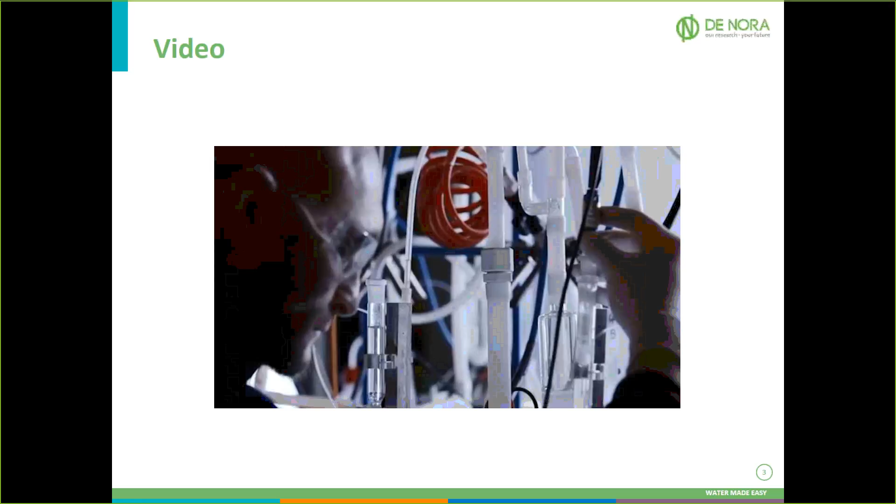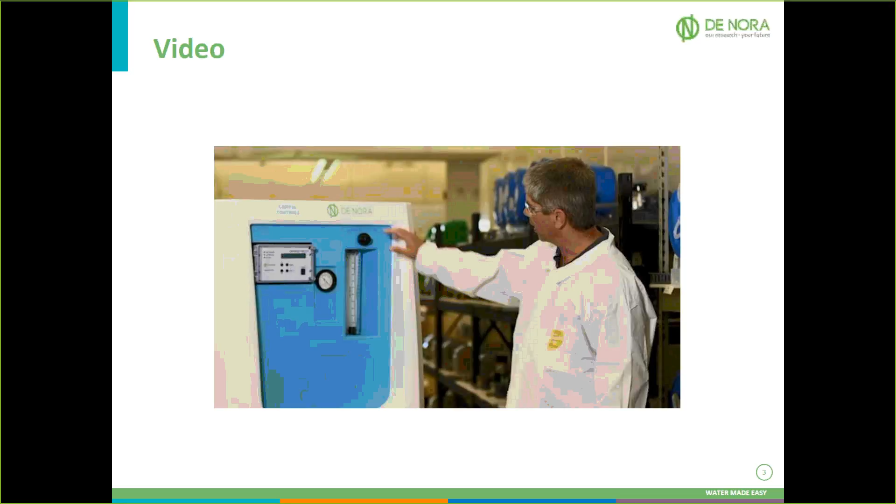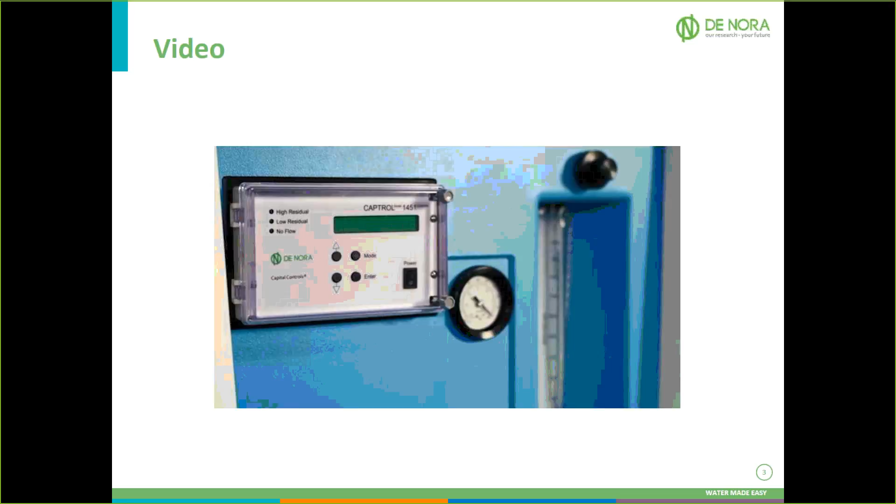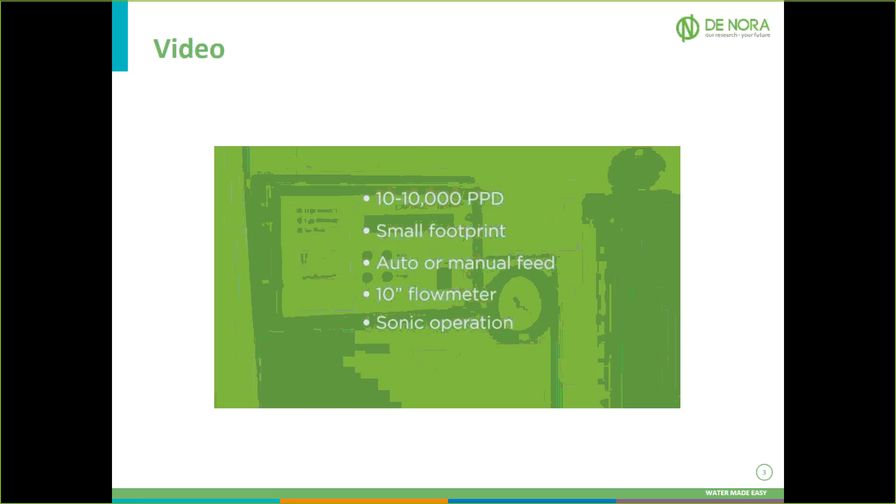Sustainable technologies offering energy-saving products and water treatment solutions. Present in 12 countries, De Nora is an Italian multinational with 23 offices, 12 manufacturing facilities, and research centers in Italy, the US, and Japan. With its continuous focus on new product development and innovation, in 2015 De Nora acquired a series of familiar water treatment brands, among them the Capital Controls product line, an industry pioneer. I'm very proud of our brand's heritage: in 1950, Capital Controls invented the vacuum gas feed system, very unique to operate and highly reliable, which is why it's been the industry standard for over 50 years now, with 355 patents and more than 2,700 territorial extensions. The products incorporate reliable Capital Controls technology with innovative new features, including a pressure monitor to refine the gas cabinets. Each compact cabinet is available with automatic or manual feed and a 10-inch flow meter for ease of reading, and a differential pressure regulator. On the full automatic model, an additional controller may not be needed, reducing extra equipment and costs for our end users. We believe this makes it easy for engineers and end users to clearly identify what type of equipment is needed for specific applications and functions.

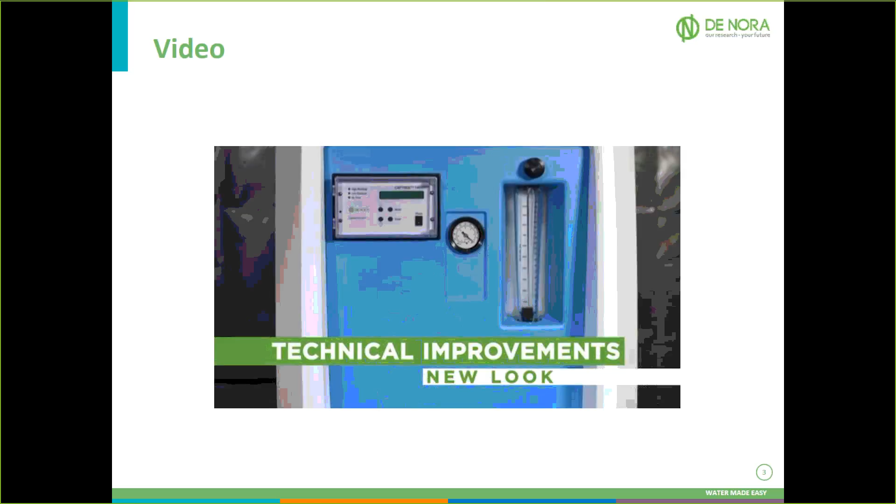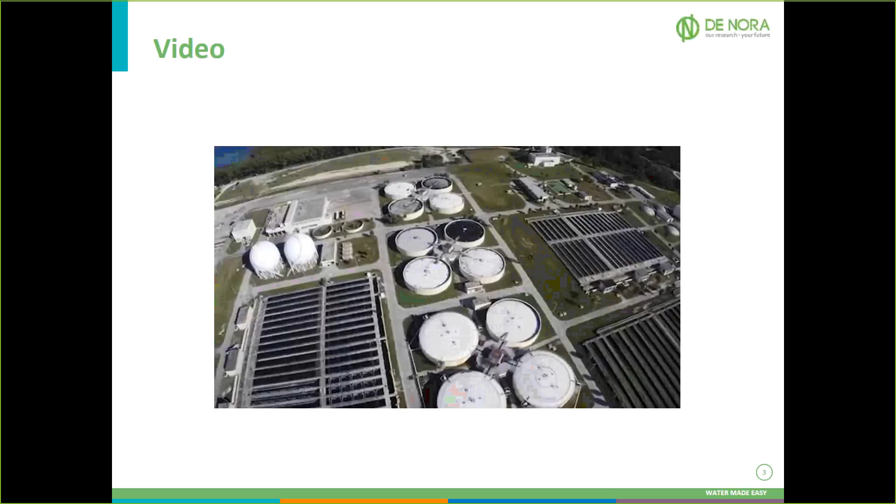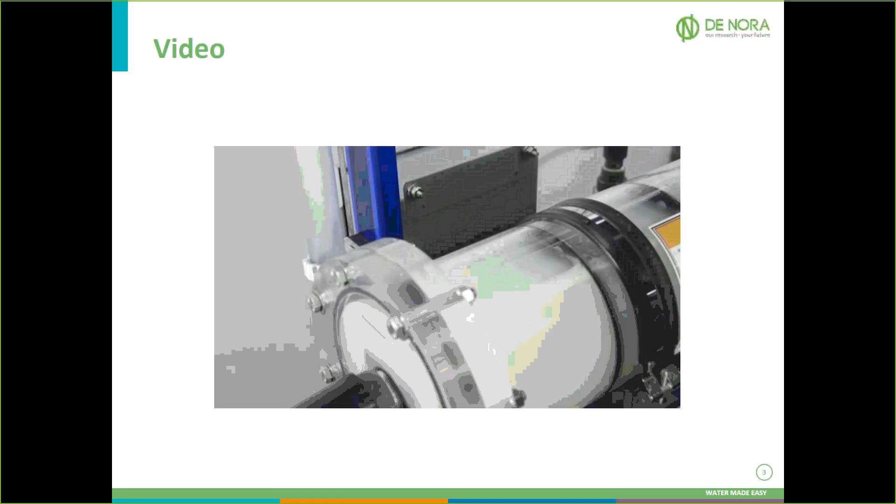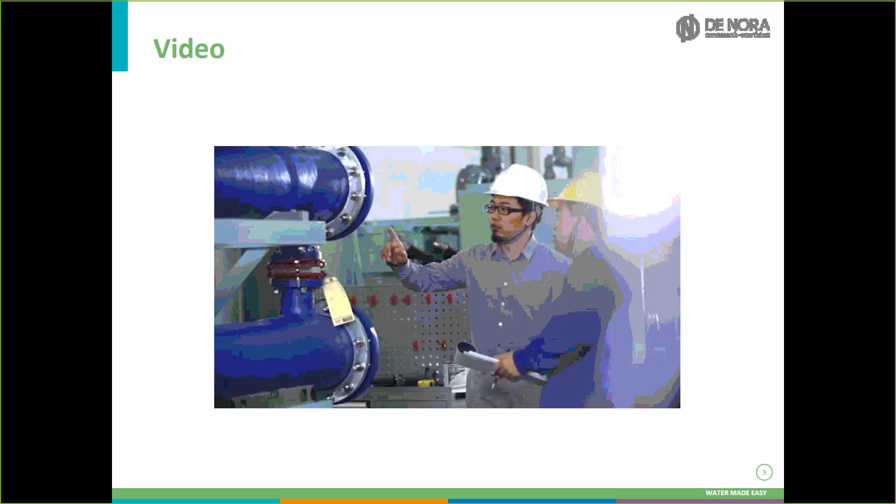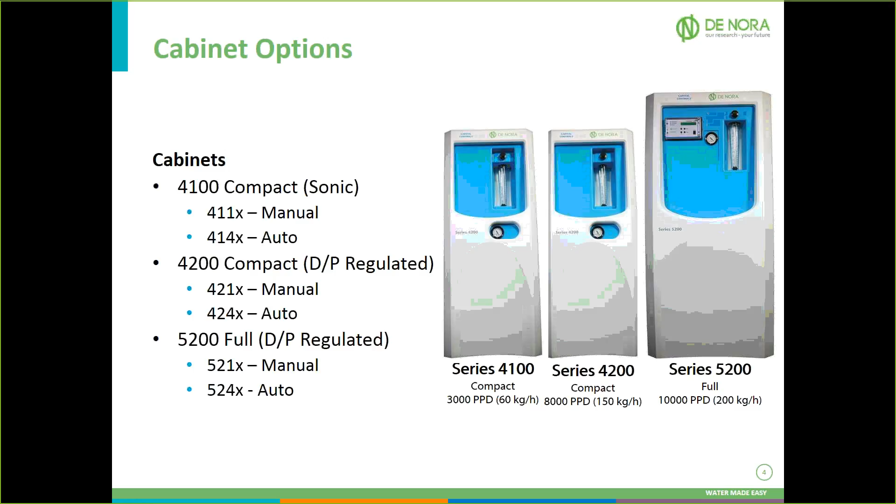So the cabinets range from small to 10,000 pounds a day. All of our cabinets now feature a 10-inch large flow meter rotameter. In the past, some cabinets had a 6-inch rotameter, but the nice large 10-inch rotameter is easier to see from far away. A lot of times these cabinets are in a chlorination room, and sometimes you're looking in through a window, so it's nice to have a big large flow meter you can see. We've standardized around a large flow meter for all these.

We've also standardized around the Chloromatic valve, so that all of our automatic valves feature a single input right to the valve itself. So if you have an application with a single input, whether it's a simple flow pacing application or even some applications where the SCADA system is doing the control and you're sending a flow signal into the cabinet, there's no need for a controller on all of our automatic cabinets now.

It's just a single input application. And like we said on the 4100 series, up to 3,000 pounds a day. That's a sonic unit, so no need for a differential pressure regulator, which keeps the cost down.

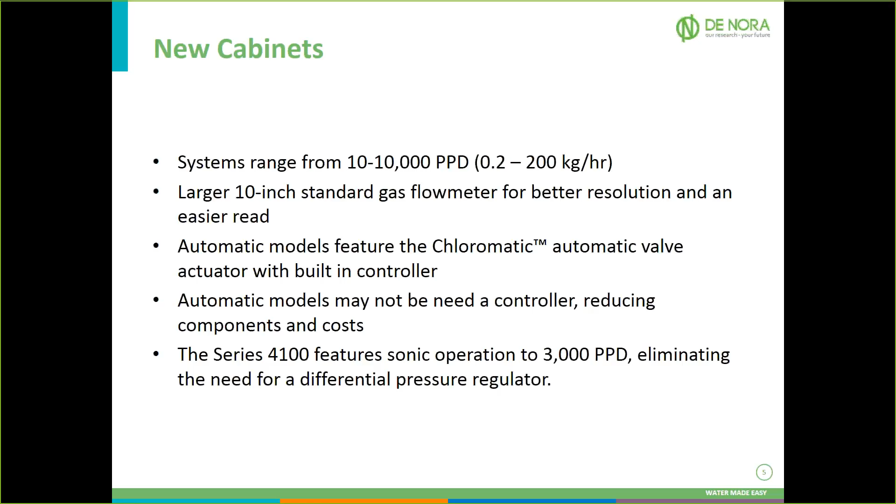All the automatic cabinets are standardized around that actuator. That's basically what we've done to the cabinets we announced at the show, and we're excited to get feedback as we start seeing those out in the field next year, 2018. I also wanted to describe a bit more and round out our chlorinator line.

We've made some changes to the chlorinator line. We've got our Series 2000 CV wall valve and Series 3000 CV wall valve. For those familiar with the old 70CV2000 and 70CV3000, we've changed the names and repackaged them. So now for a wall valve, we have a 2000 CV and a 3000 CV.

We've packaged those. We've always had the 3000 CV valve, the triple input valve, on a wall panel, but we also released the 2000 valve on a wall panel - the new 2000 WP you see here. We have a couple different sizes for these valves, from up to 500 pounds a day up to 3,000 pounds a day in different configurations.

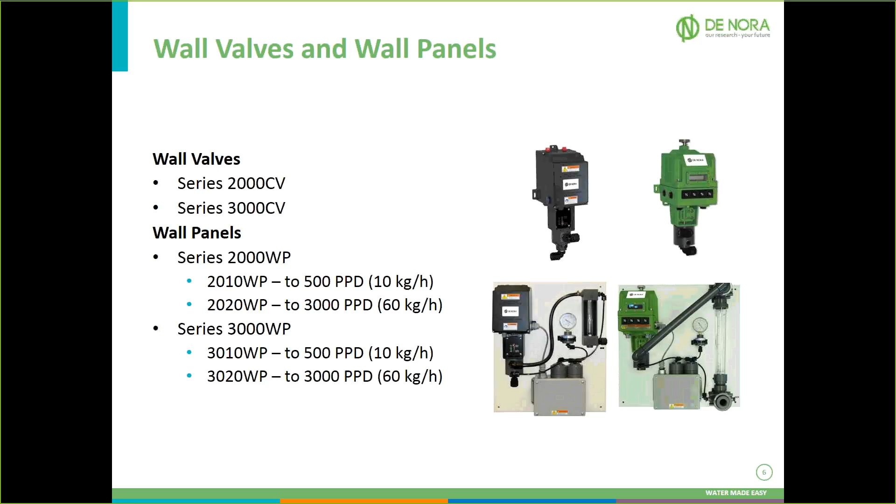These are available as wall panels, where we provide the panel along with vacuum gauges and vacuum switches if needed, or just as a wall valve mounted directly on the wall. Here's the 2000 CV packaged as a wall panel, available from 25 to 3,000 pounds a day.

The vacuum switch box here is an optional adder, sold separately, so if you need it you can buy it separately and just wire it in or plug it in. The vacuum gauge is also sold separately - you can buy that and plug it in as well.

Just like the cabinet, we've built in a single input controller. It does ratio control, so if you have a simple flow pacing operation, there's no need for a separate controller - this valve will take that signal right in, and away you go.

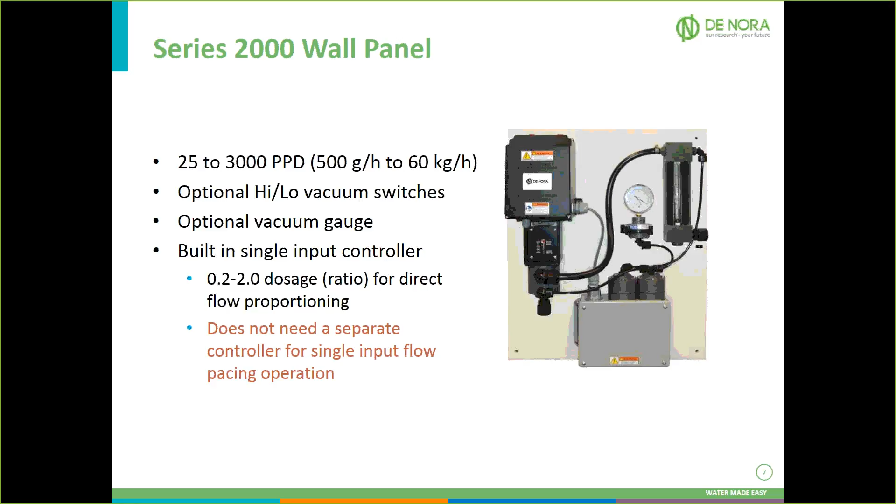And of course we have the 3000 series valve. For those familiar with the CV 3000, that's essentially this valve - we just renamed it and simplified the name. So it's now the 3000, and in this case we're showing it in the WP, on a wall panel. The gauge comes standard.

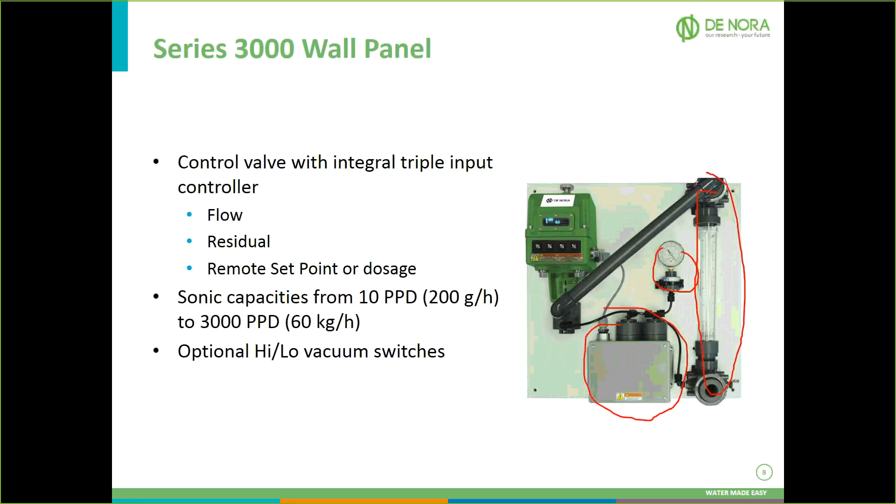The vacuum box switch is optional, and of course there's a nice large 10-inch flow meter that we're going with. This package - I'm pretty familiar with it, we've done this for quite a while - we just renamed it and changed a bit how the options are sold. It's the same 3,000 CV valve that we've seen a lot of success with over the last several years.

As a reminder rule of thumb: for the wall valve, the 70CV3000 is now 3,000 CV, the 70CV2000 is 2,000 CV. We discontinued the old Advance 1410 for those familiar with it, and replaced it with our 2,000 CV or 3,000 CV. So you'll need to work with your salespeople if you do a replacement.

On the wall panels, the old WP 1410 and 840 that you guys have out there need to be replaced with the new 2,000 or 3,000 wall panels. Feature for feature, we've got all the features we had before, just in a new configuration. The 2,000 WP goes to 2,000 CV, and the 70 CV 3000 goes to 3,000 WP - just little naming scheme changes we've made, with all the same functionality and product demand as before, just under a new product line.

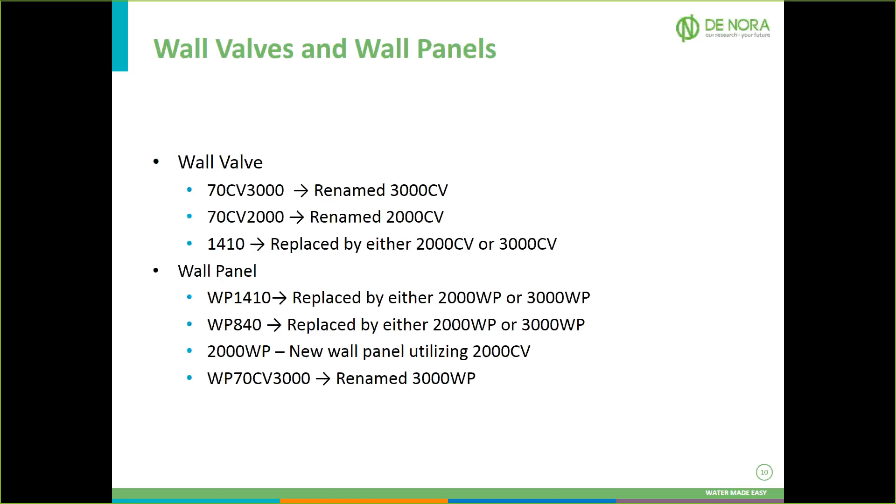So we can also do retrofits. If you have customers with existing applications or components, give us a call, give your regional manager a call, and we can help figure out how to take you from the current technology to the new technology. A lot of this can be retrofitted into existing applications—often we're just changing pictures and serial numbers of equipment that's already out there if we want to upgrade it. So I encourage people to work with the channel partners, myself, or the folks here at the factory, Phil Fallon or Mahoney, to figure out appropriate upgrade paths for customers.

Now we'll talk about the MicroChem 3. We released this at the ACE show earlier this year in June, and I'm happy to say we're shipping products right now. This is our new chlorine analyzer—really a whole analyzer family that we released, replacing the MicroChem 2 that we've had out for a number of years.

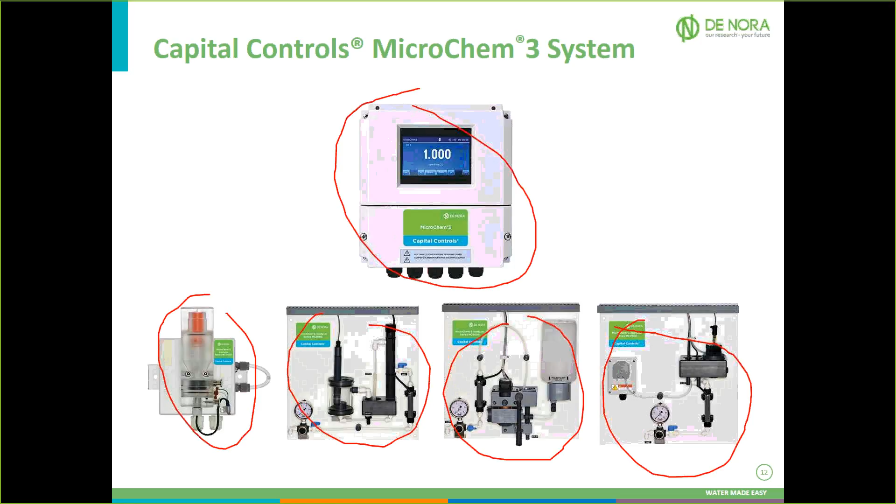You can see on this slide there's essentially a control box, a controller, and you can plug in multiple different wet ends depending on your application and what you're trying to control. So it's really a whole family of products. We'll go into some detail on the MicroChem 3—again, one common control box with up to 3 channels, so you can measure 3 different things with one control panel.

One nice feature is a color touch screen, so it's more modern and easy to use, manage, and operate—really intuitive when you're using it. We've also designed it as an international product, so if you buy the AC unit, it can auto-detect whether it's 240 or 120 volts—no jumpers or switches needed. Just plug it in and go.

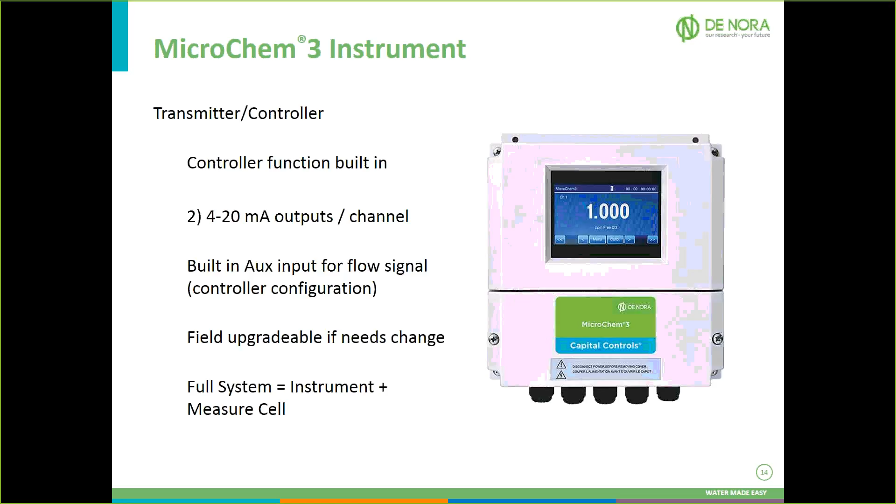We do have DC operation available for this unit, and those are just the critical part numbers for the unit, AC to DC basically. The transmitter controller has a controller built in, just like the old MC2 had. We've now put two 4-20 milliamp outputs per channel, so it can be used as a controller, and again you can put multiple instruments and measurement cells on the unit itself.

Now we'll talk a little about some of the wet ends available. The first is our MC 4000 measuring cell—our bufferless chlorine dioxide measurement, the same cell we'd use in the KC 4400. A lot of you are familiar with our existing control options, so we took the best of the technology we offered in the past and packaged it with new technology. People really like our lateral wet ends, so we retained those and just repackaged them for the MC3 series—same as the 4000, KC 4400. It's also available with a 12 millimeter probe holder, so you can have a pH probe on the measure cell as well.

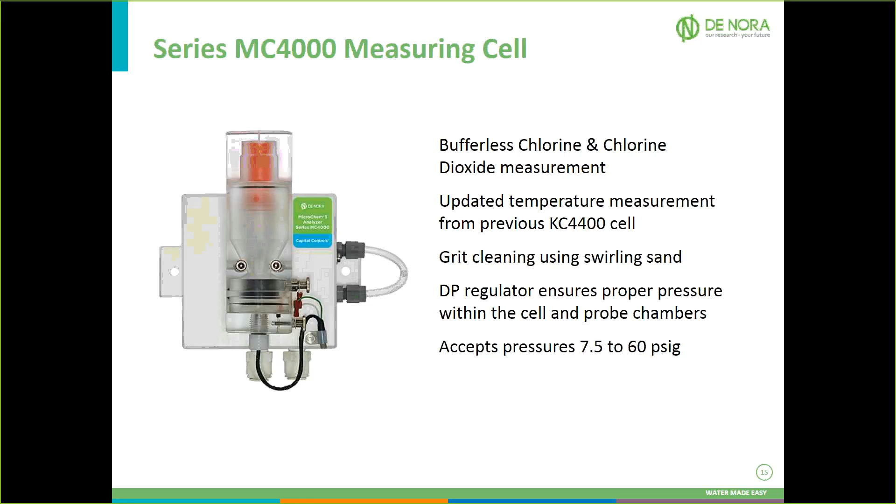The MC 5000—this cell comes mounted on the poly panel. Each flow cell can accommodate one 25 millimeter and one 12 millimeter electrode, and the calibration graph panel is accessed by rotating the overflow tube out of the drain cup. Sample flow to the panel is controlled by the optional PRV when inlet pressure is above 15 psi. We've got 3 different probe ranges available to match application needs, and the control valve can be adjusted so water is constantly coming out of the clear sample tube on the left side.

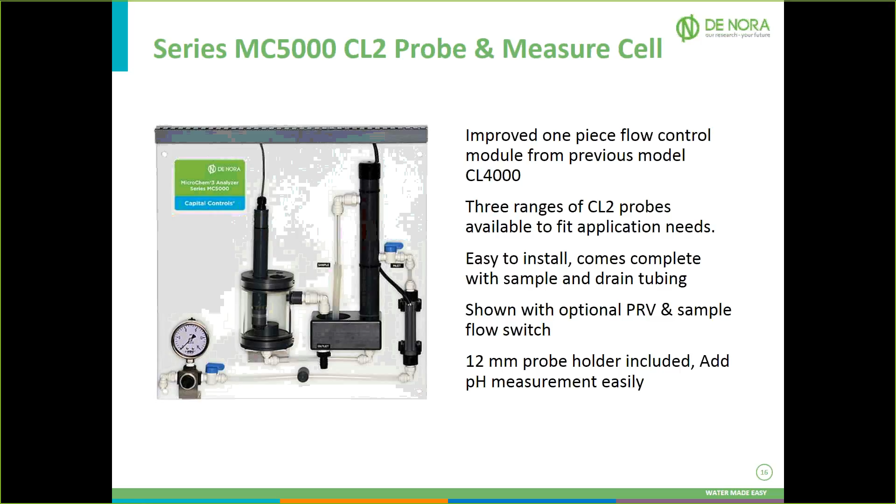So again, that's our MC 5000 cell for the CL2 applications.

The MC 6000—for those familiar with the 1870E analyzer, you're probably looking at that wet end thinking it looks pretty familiar. And of course it is, because it has the same basic components. We pair it on a PRV, 150 psi inlet, and the reagent supply can be replaced weekly with a convenient bottle located on the right side of the panel. So yes, really the 1870E package for the MC3 series.

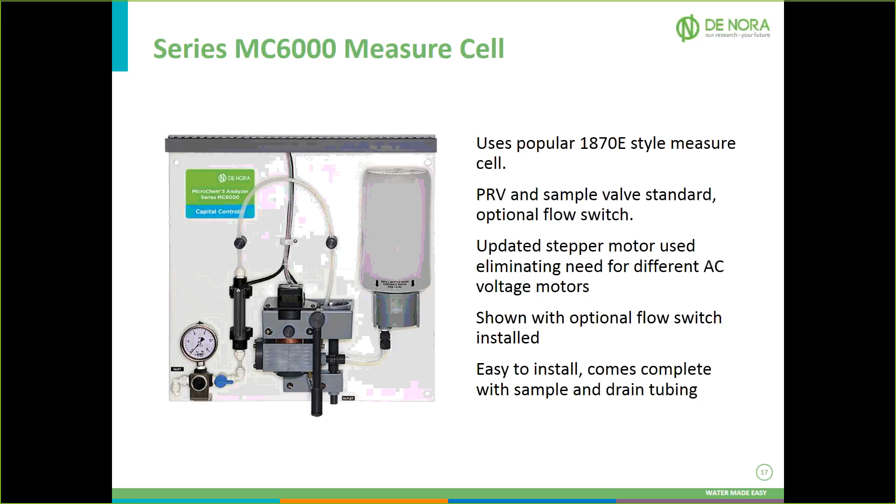Here we have the MC 7000. This is essentially the CL1000 measure cell with a 3 electrode design. It also has a reagent pump, and here you can do up to 5 weeks between refills. So if you want to scale up to the CL1000, or if you're familiar with the CL1000, the MC 7000 is the way to go.

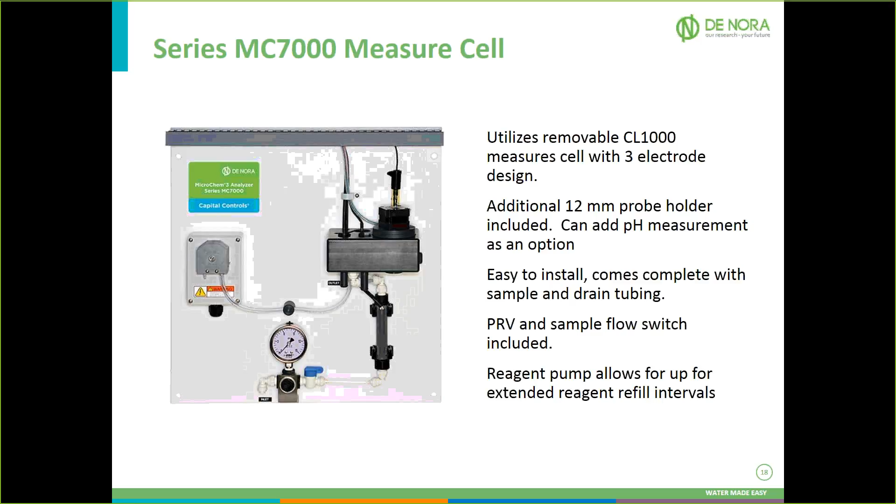A lot of times people ask, which chlorine measurement cell should I use? Really the first question is, is it free or total chlorine? And then the pH of the sample, is the pH stable? If it's stable, you can probably get away with a bufferless design. If it's not stable, you need a buffered design. Then water or wastewater, of course, drives that and the range of the measurement. Oftentimes the choice of cell will be driven by the customer specification.

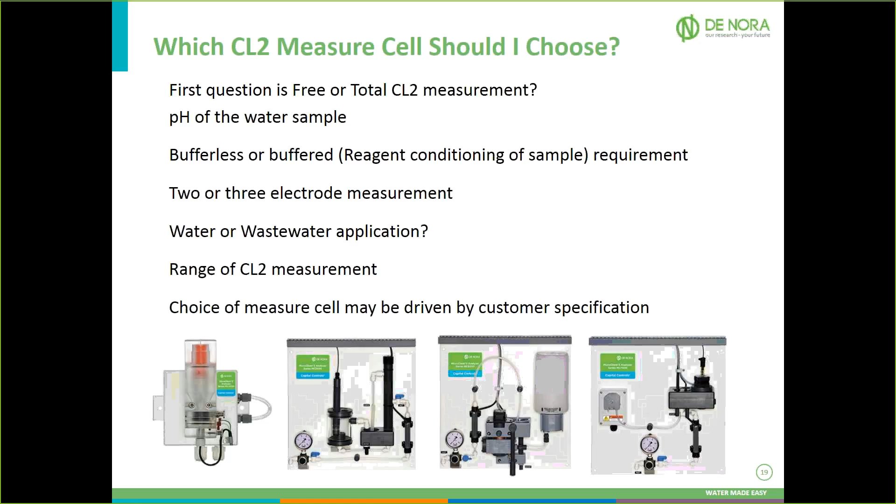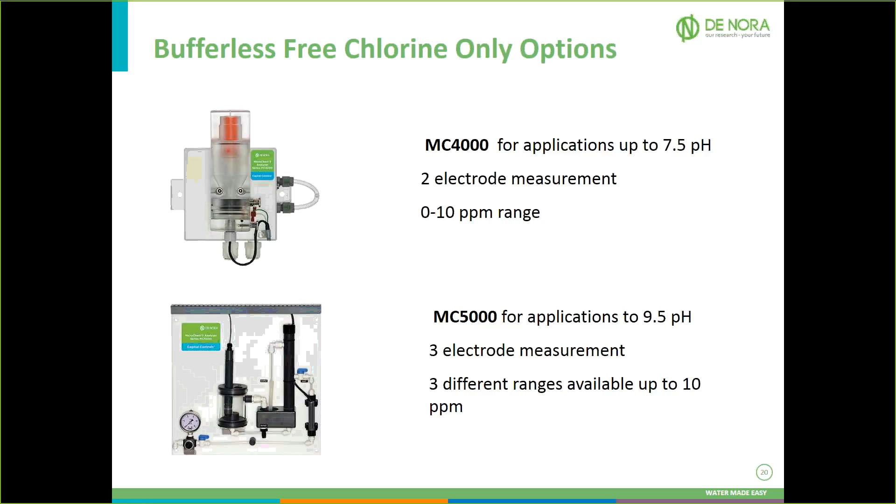So let's go ahead and look at some of the options there. For bufferless free chlorine, the MC 4000, so pH up to 7.5, 0 to 10 ppm. If your pH is higher, the MC 5000 with 3 electrode measurements, you get 3 different ranges, up to 10 ppm. Those are your bufferless free chlorine options.

If you want to go free or total, then buffered options, that is, the pH is going to be changing. The MC 6000, up to 20 ppm range with 2 electrodes, and of course the MC 7000, with the long reagent pump, up to 5 weeks, with 3 electrodes, up to 20 ppm.

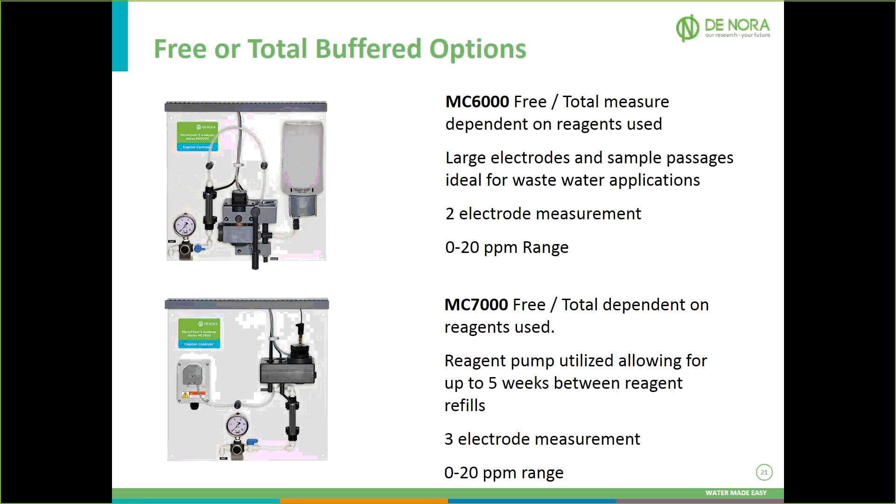And then for pH and ORP, we've got some small wet ends, 12 millimeter probes for pH and ORP, just like we've had before.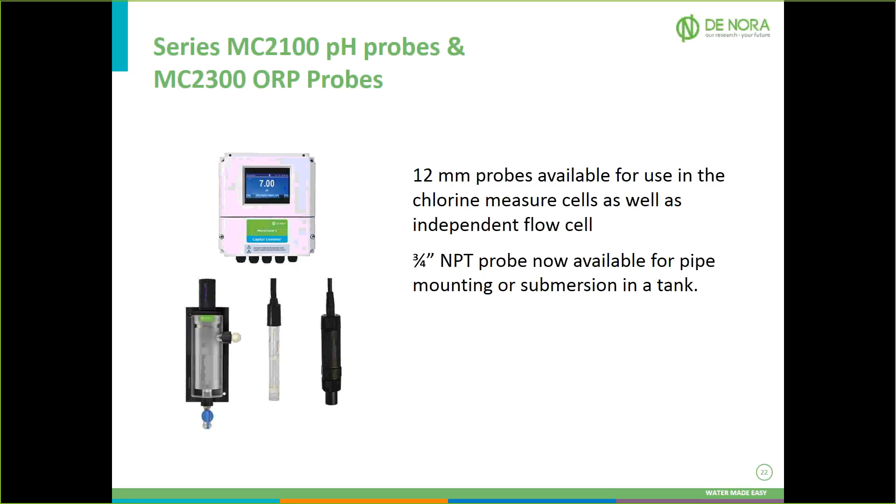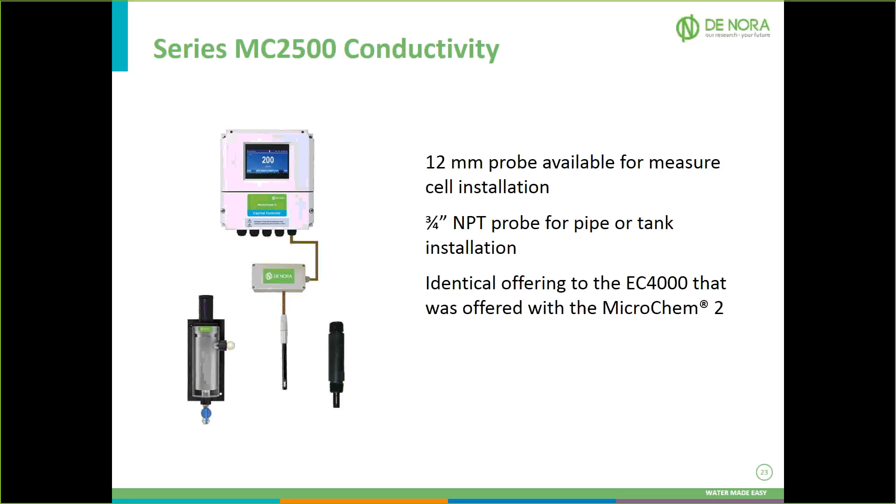And conductivity as well, we call it our MC2500. So our conductivity probe is just like the old EC4000 that we were offering with the Microchem 2.

People ask, can I update my Microchem 2 instruments to the new Microchem 3? And the answer is absolutely yes, you can. We've really tried to make an effort to be compatible with the existing installations and designs out there. So you may notice the physical size, the mounting components, the mounting structure, are very similar to the MC2. And a lot of those wet ends are pretty much the same wet ends, just packaged differently than before.

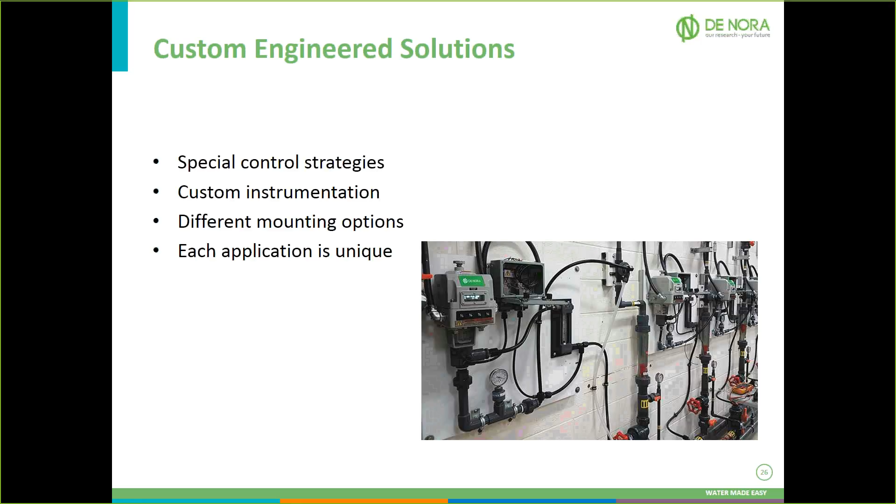And then we had a display showing the Microchem 3 at the show as well. So a nice display for the Microchem 3 at our booth.

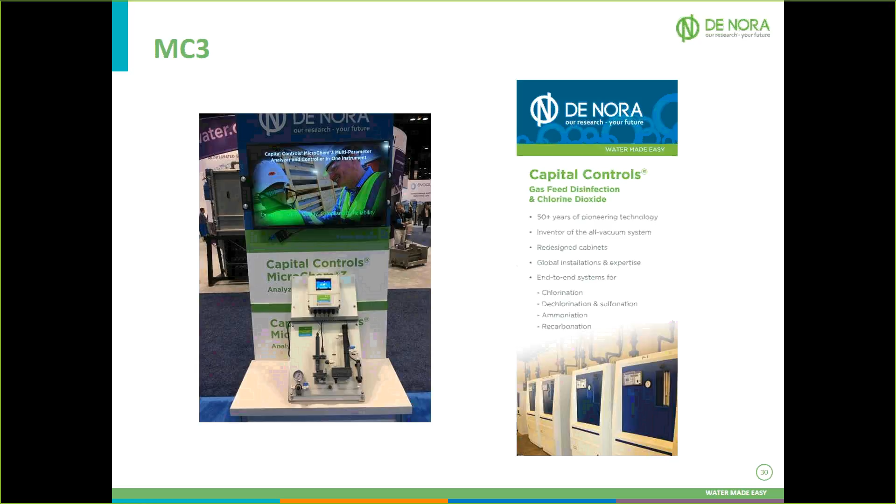So we actually have a bracket that we're selling now that mounts right on top here that you can attach the controller to for the compact, if it's needed. Or the bracket's optional, people mount the controller wherever they want — it's just a small cable that runs to the valve. That's still the case, I'm afraid, with the compact: there is no room for the controller on it.